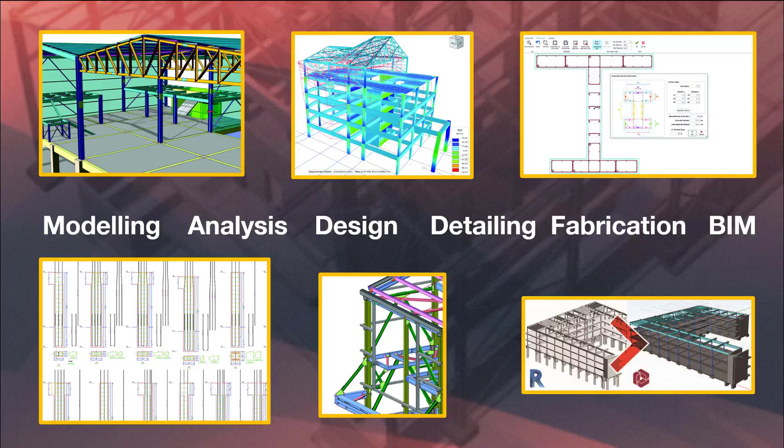In 2021, we introduced a revolutionary software which transforms the way engineers work and collaborate forever by integrating the way we model, analyze, design, detail, fabricate and coordinate BIM models with one completely integrated solution. One solution that combines all that structural engineers do when delivering projects into one software for building design and documentation. Integrating modeling, analysis, design, detailing, fabrication and BIM all in one, ProtaStructure 2021.

And boy has this been well received. Since we revolutionized the structural engineering industry in 2021, Prota has been growing at a frenetic rate as engineers around the world look to streamline and simplify the way in which they deliver their projects faster and more efficiently than ever before.

Since the release of ProtaStructure 2021, we have expanded our global reach to more than 30 more countries around the world. We are now actually supplied to over 60 countries around the world, not just with generic solutions, but with bespoke, customized solutions tailored to suit their local preferences. We have delivered even more codes of practice to support this, which continues to expand our reach.

And we have also allowed engineers to experience ProtaStructure firsthand with our comprehensive free trials. If you haven't already tried this, please jump onto our website, download it and give it a go. And we've improved further support with new YouTube videos, technology updates, new design guides and enhanced help systems and more to allow you to get the most out of your investment.

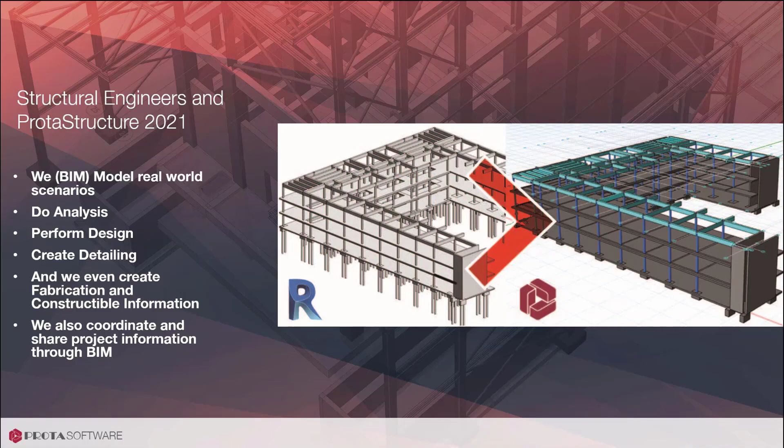We have seen more and more engineers around the world taking advantage of fast modeling, dedicated building analysis, bespoke design, automated detailing, fabrication, and sharing and collaborating BIM information with other parties. All the things they need to do to get the job done, with our one solution, ProtaStructure 2021.

This year, to recognise the efforts being made by thousands of users around the world, we established the inaugural Prota Design Awards for celebrating industry excellence in using ProtaStructure. Let's take a look at the winners.

We received some amazing projects from over 30 countries around the world, and it's been great seeing the many ways engineers have been using Prota's technology on building their building design, and this continues to encourage and excite us as we move forwards.

Innovation is part of our DNA at Prota, and over the course of the last 18 months, our teams have continued our journey to create elegant and practical structural engineering design solutions. This year we have focused on extending and strengthening ProtaStructure's capabilities to provide you with more flexibility, speed, transparency, design and BIM capabilities, all allowing you to better shape your world with our brand new ProtaStructure 2022.

Today we will be taking you on a journey through ProtaStructure 2022, and we are going to share with you many of the fantastic enhancements which make ProtaStructure the leading structural BIM platform for buildings. We're very excited. This has been a culmination of effort from a fantastic team of professional engineers and software developers around the world to realise this vision.

So, without further ado, what's new, Mustafa? Thank you, Nigel. This year we have made modeling more flexible and adaptable, allowing you to consider a broader range of structural arrangements together with increased flexibility to handle a range of different loading scenarios. This builds on Prota's impressive modeling capabilities, where you can start models in a range of ways.

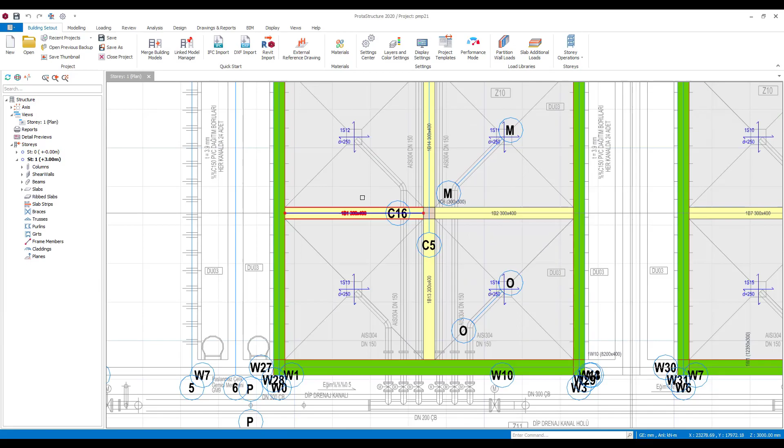Here you can see how we can create models from scratch using pre-existing BIM information like Revit, DXF, SAF, and IFC data. See how you can overlay against architectural drawings to coordinate and create your structural arrangements, or extrude elements directly from structural CAD files to set up key plans quickly. Furthermore, see how you can take advantage of existing BIM information, including IFC and Revit data, to start your modeling journey with speed and ease.

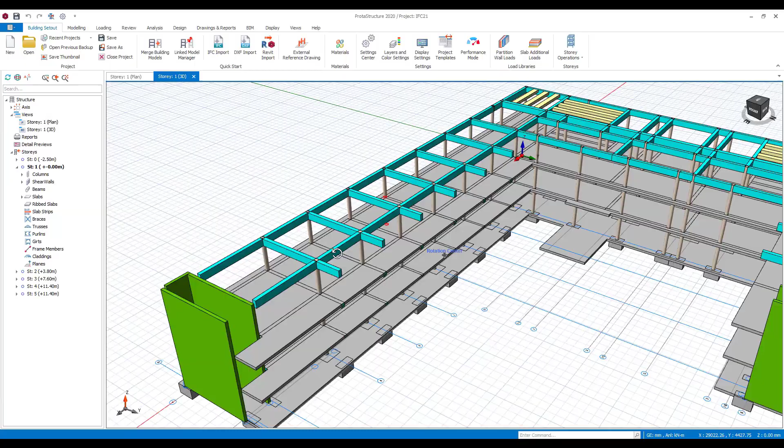ProtaStructure modeling takes advantage of dynamic input, where you can create axes, columns, walls, beams, slabs by boxing around or drawing what you want to see.

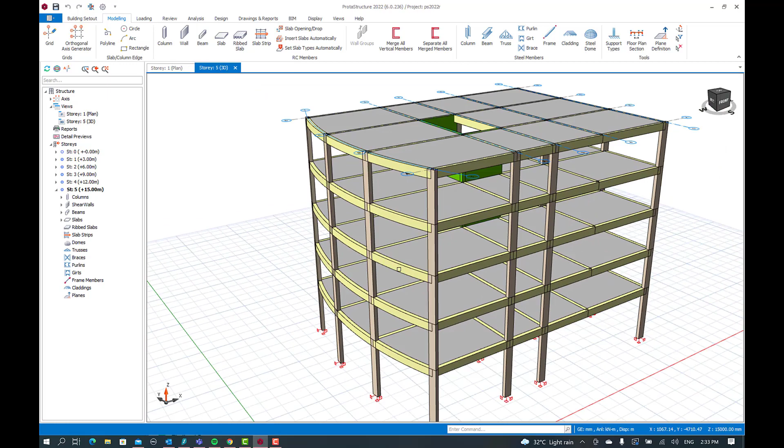ProtaStructure also uses intelligent contextual modeling to create a range of structural objects exceptionally quickly. Whether it is integrated core walls, trusses, braces, purlins, or girts, ProtaStructure provides intuitive modeling commands to preview and rapidly create these items instantly, without the headache of modeling every node, member, and property. Furthermore, this intelligence passes into element design, as ProtaStructure knows you are designing a core wall, truss, or purlin, and efficiently handles all the associated design checks.

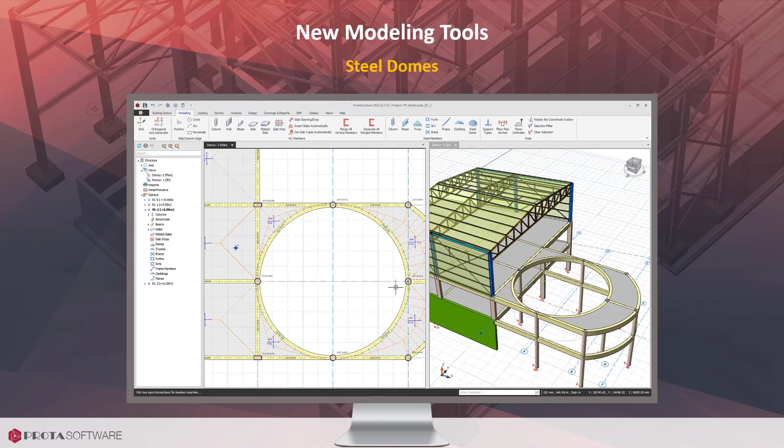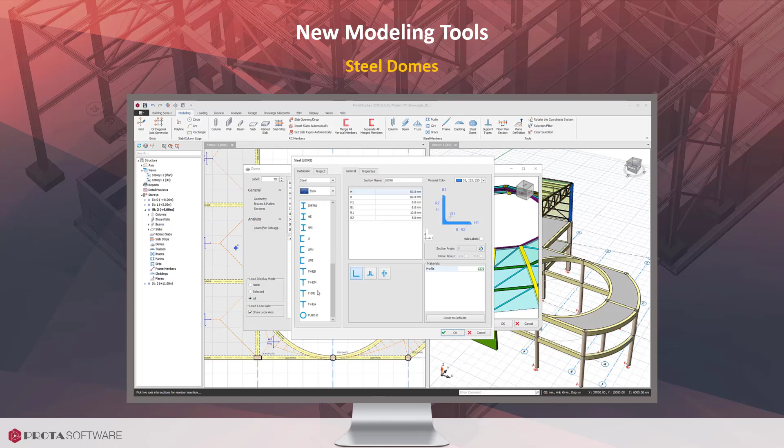With ProtaStructure 2022, we continue to expand this flexibility and speed. You can now go one step beyond and create steel domes with the help of a highly parametric wizard. This is dynamic and detailed. See how you can independently control the geometrical and section properties for crown, longitudinal, latitudes, brace, and purlin members, forming the perfect dome of your choice.

It doesn't stop there. Now, we make it possible for you to insert curved frame members in any plane orientation, allowing you the flexibility to express yourself and meet more demanding geometric challenges architects and developers are pursuing.

This can easily be complemented with free member modeling, allowing more freedom than ever before. It looks great, doesn't it?

We also strive to improve the performance and technology of our software in almost every release we deliver, making it a faster and more streamlined experience for you.

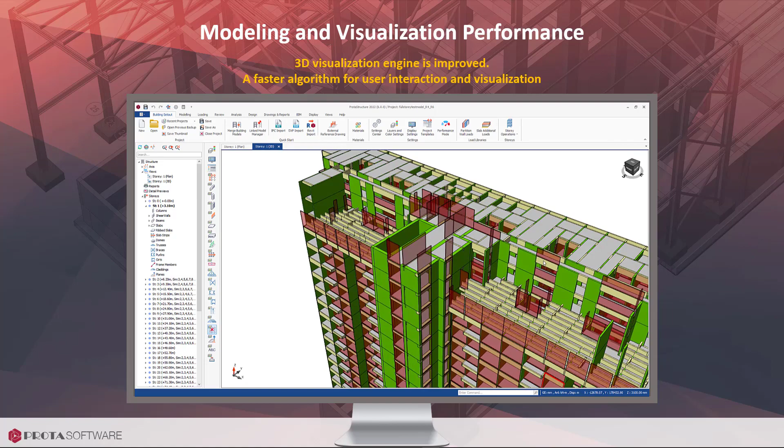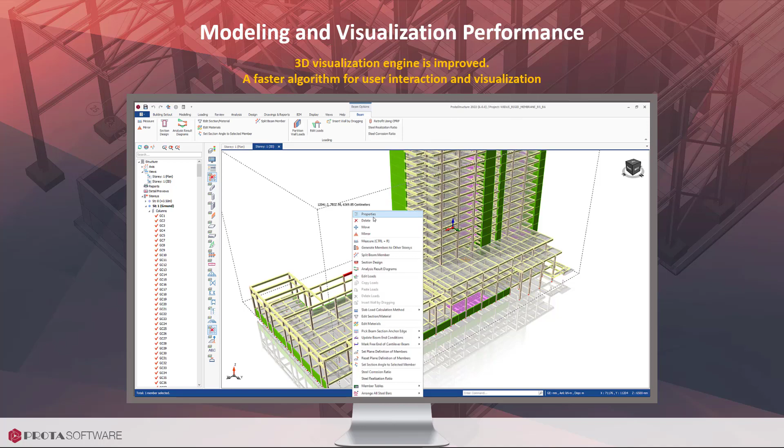In ProtaStructure 2022, we focused on increasing the performance of our 3D visualization engine and user interactions. You will find performance gains up to 10-fold depending on the model size, allowing you to quickly and dynamically interact with the smallest house to some of the most significant buildings in the world, providing our users with a fast, smooth user experience.

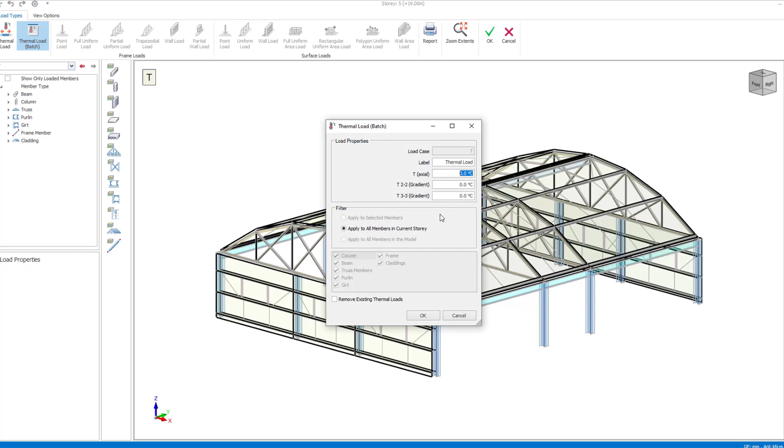We recognize that engineers want the flexibility to create any type of load intuitively and quickly to any element in their projects. With ProtaStructure 2022, we have completely redeveloped our loading system to provide unprecedented flexibility to define the loads you want on what you want.

Don't worry, all the great features which make ProtaStructure so efficient, including automated slab load decomposition and dedicated brick wall loading on beam members, remain—of course, with a lot of enhancements and automation. For example, you can now see how the height of the infill load automatically updates when the story height changes.

I can apply additional member loads in any orientation to any load case, or use the load generator for quick generation of any common load profile.

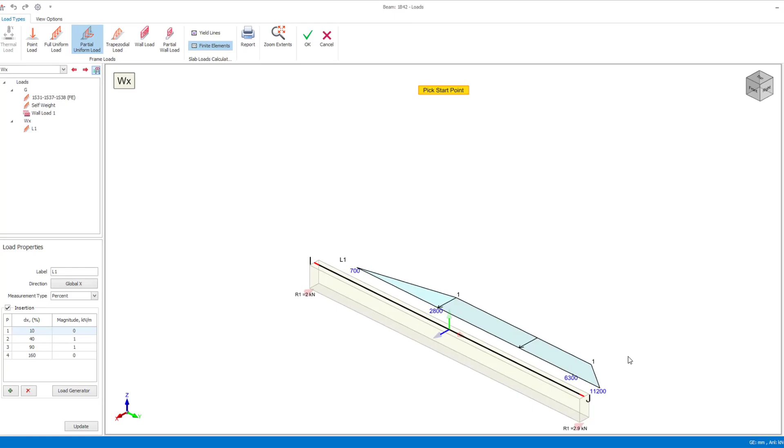We know that it's tedious and time-consuming work to calculate and apply soil pressures. Now we take that burden from your shoulders. Just provide your soil profile and specify the surcharge loads. Resulting static and dynamic loads are calculated according to your preferred loading and seismic codes and applied automatically. You can do further editing on the calculated loads and even create a detailed report.

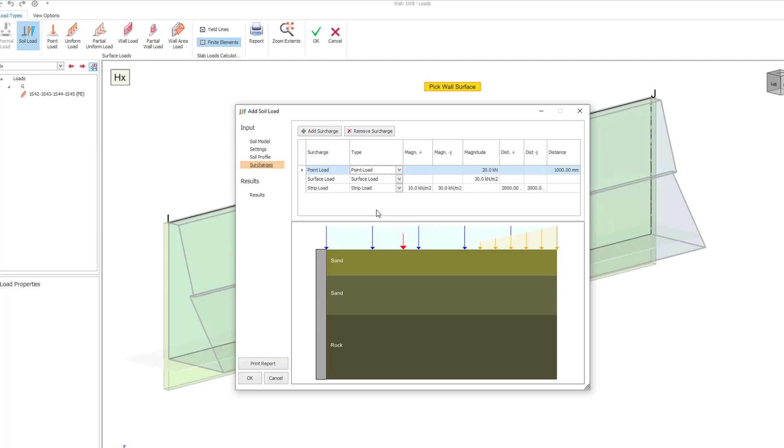As we covered already, you can create frame members curved in any plane. Let's see how easy it is to load them too. You can use the quick snap points interactively or use the insertions table. This helps you define your load as a percentage of the member or with an absolute distance.

Truss loading is faster than ever too. Point loads on nodes or line loads on frames are defined intuitively, just like the domes. Well, domes need further attention as they can also utilize pressure loads. Just enter the magnitude and show where to apply.

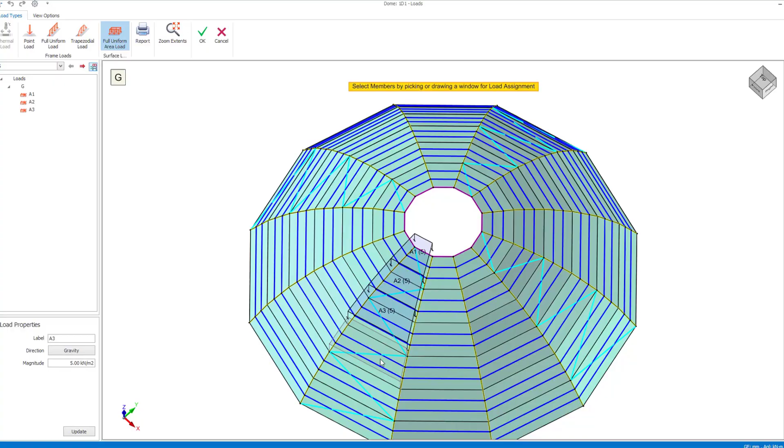You can define cladding loads similarly. This time let's see how quickly we can define pressure loads by just boxing around instead of picking members.

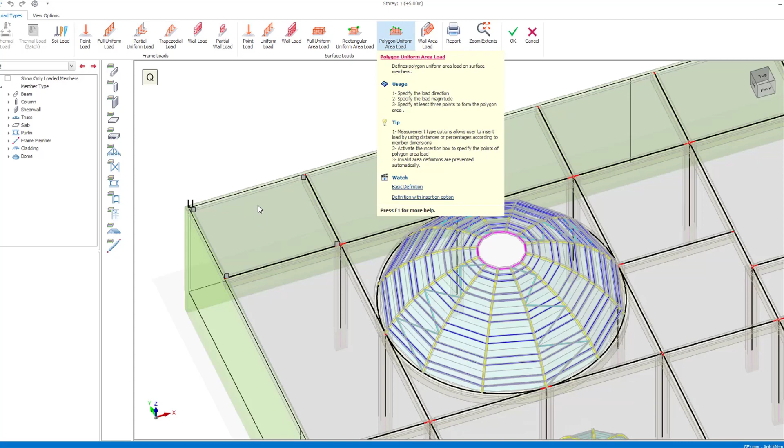Although working on individual members carries its own advantages, sometimes we need to see the loading of the whole story. When I switch to story mode, I suddenly possess an X-ray of the model, allowing me to easily filter and spot specific member loads and apply new loads of any kind.

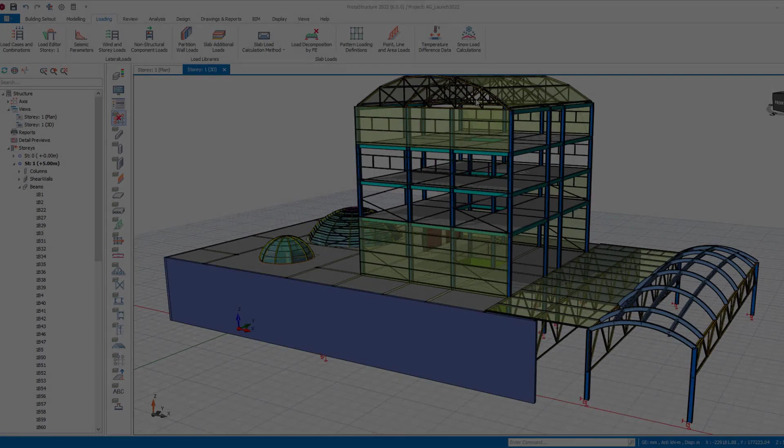Maybe you create a slab patch load and copy it to the other slabs. Or let's take this curved frame load and apply it to the other frames, which in fact have different geometries. You can delete, copy and paste loads, even between different load cases in this editor.

But we haven't kept these crucial functions inside this editor only. Enhanced versions of them are still available in the modeling environment as well. You can copy the loads between members for any load case and load type using a single user interface. And of course, you can still copy infill loads and paste them by dragging.

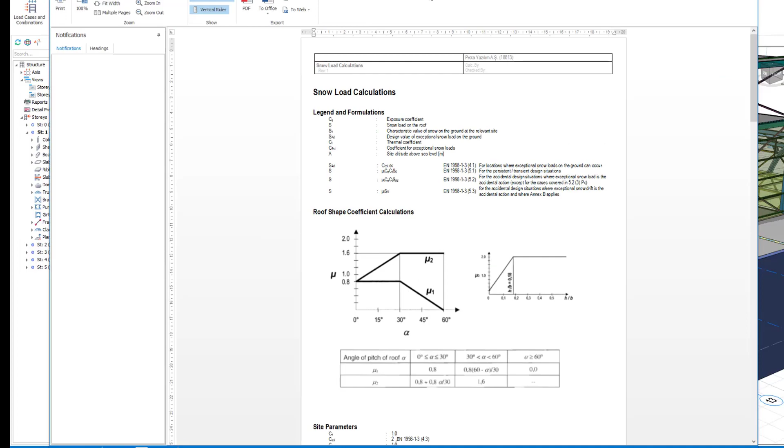For those in colder climates, we have implemented automatic snow load calculations to Eurocode, including the base code and a variety of national annexes. A parametric wizard will guide you step by step in calculating the snow load in your region and applying these to your models. Quick and easy.

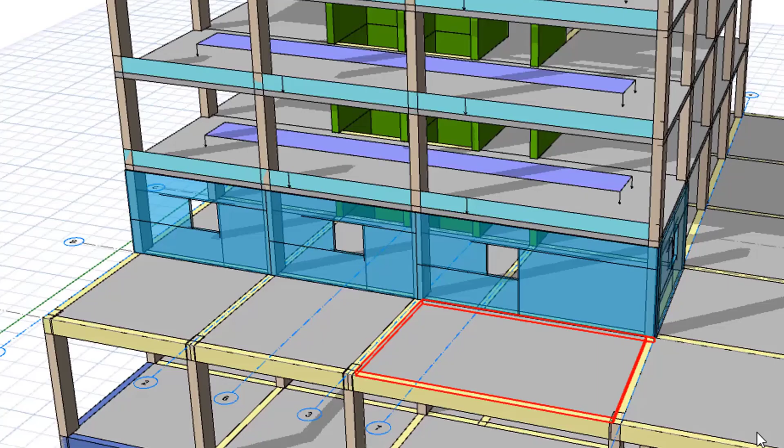What if you want to apply some of your vertical loads in a separate load case? Maybe you have special equipment loading to be applied and you want to treat this loading exclusively with different combinations. Here I am creating such a user-defined vertical load case, and I can instantly start assigning loads with this one. Let's create a patch equipment load on this slab.

Now I can copy this load to the other slabs. All done in seconds. In a nutshell, ProtaStructure 2022 redefines how you work with loads.

Engineers are increasingly faced with a range of different analytical considerations as structures become increasingly complex. Whether you are looking at a finite element floor analysis, complete building analysis, considerations like soil structure interaction, or methodology for tackling super high-rise buildings, at Prota, we have been looking at better ways of simplifying the management of all these considerations in one.

To assist with this, ProtaStructure 2022 introduces several great new analysis features, starting with our new analysis framework.

ProtaStructure 2022 makes it easy to analyze the floors separately. You can control the mesh sensitivity and other mesh parameters, such as the inclusion of column outlines in the FE mesh.

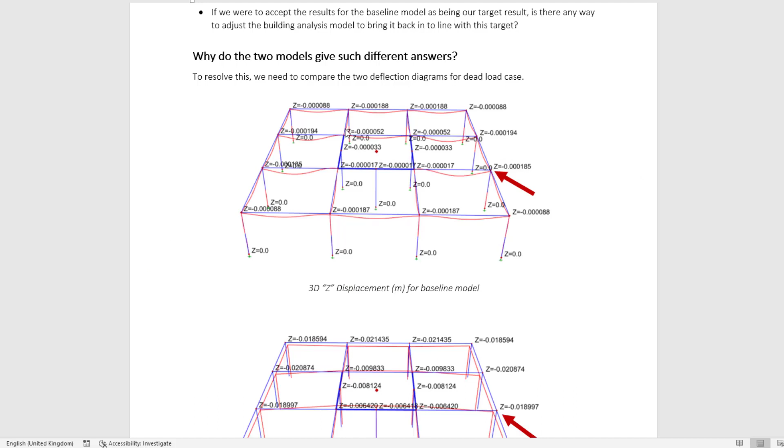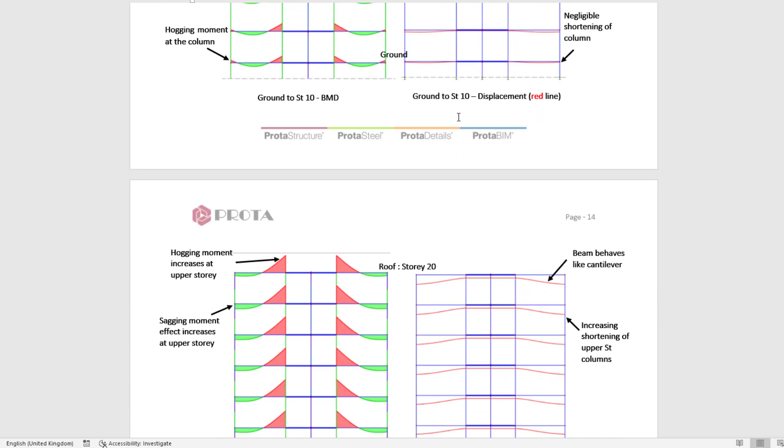Here we isolate the building floors and analyze them under vertical loads only. This approach may be preferred by engineers who want to design against vertical loads by approximating conventional methods using this sub-frame analysis model. This method helps eliminate the 3D frame effects caused by differential axial deformations in a 3D building analysis. However, you should be comfortable that this approach is suitable for your building.

You can easily review the finite element results by quickly switching between the stories in the analysis post-processor. When you're done, you can proceed with the design of the slab reinforcement using vertical loads only if you wish.

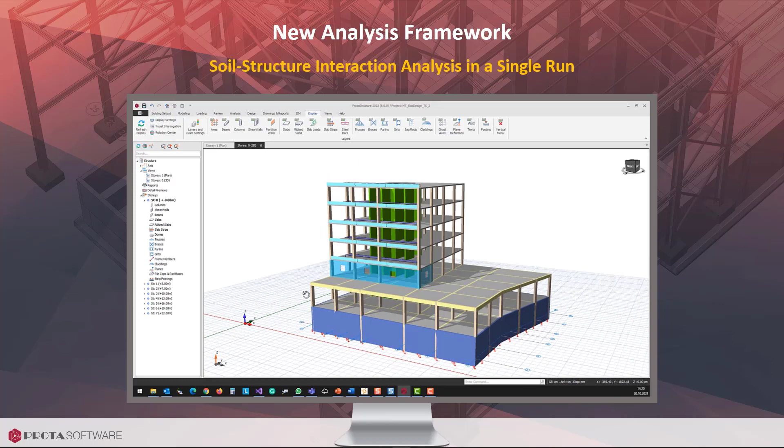You can also now perform soil structure interaction analysis in a single analytical run, together with the superstructure, enabling you to automatically model the foundations and consider the analytical foundation model in the building analysis. There is now no need to iterate between the building analysis and foundation models like older Prota versions.

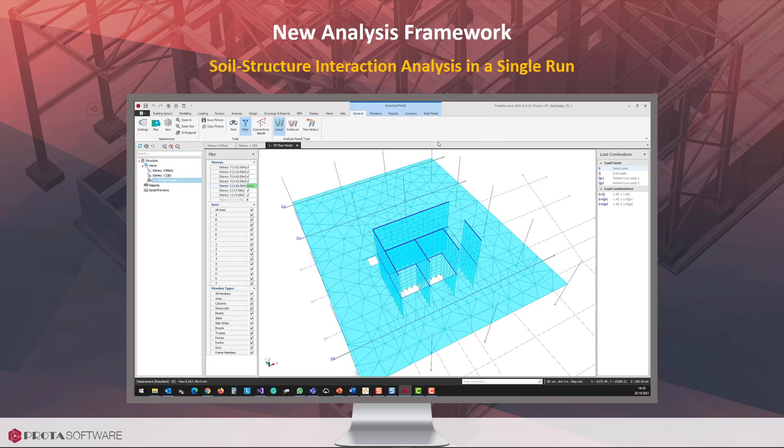We have also introduced next level in analysis post-processing. This provides significant performance improvements, including faster and improved visualization, better RAM, CPU, and GPU utilization, improved finite element contouring, complete 3D visualization of slab strip diagrams, and a great new diagram plan view where vertical results can be easily interpreted and reviewed in plan.

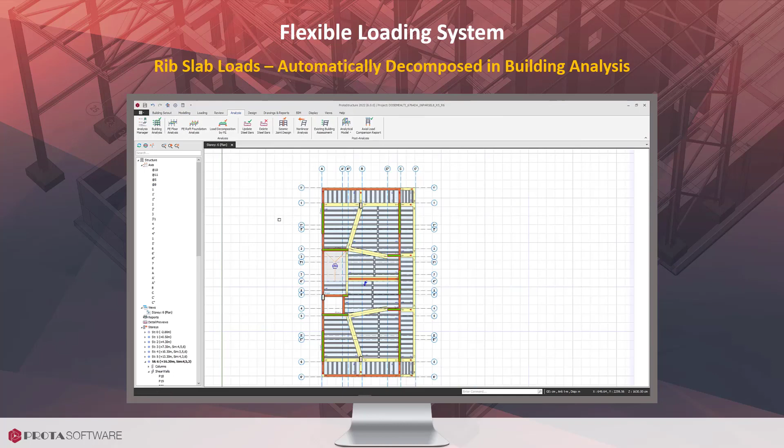Rib slab loads are now automatically decomposed in building analysis. This approach improves upon previous versions of ProtaStructure, in which rib slab loads were decomposed by the yield lines method or finite element decomposition method before building analysis.

However, from now on, rib beams are automatically included in the building analysis model and loads are transferred intrinsically during the analysis using the defined connectivity.

And especially for those engineers taking on some of the tallest buildings, we have also introduced advanced stage construction analysis. This is where you can now consider the variation of time-dependent properties, elasticity, creep, and shrinkage of concrete based on time models specified in FIP Model Code 90 and Eurocode 1992.

Creep and shrinkage strains are incorporated in the stage construction load cases, and analysis is performed depending on the time between stages and post-construction. This new capability now allows engineers to more accurately assess the behavior of tall buildings, where these effects may require careful consideration.

So, with our new analysis framework and great new features like advanced stage construction, you can see we have added some excellent new analytical capabilities in ProtaStructure 2022 this year.

Naturally, with extending our modeling and analysis capabilities this year, we have also focused on extending our design capabilities, where significant strides have been made.

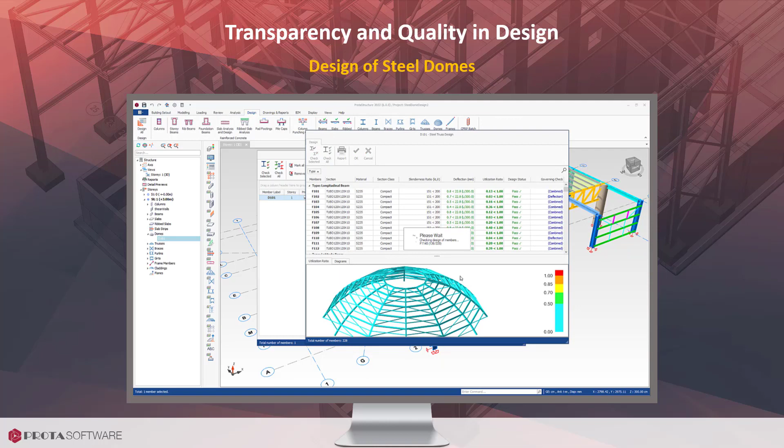Some of the exciting new design capabilities we have been busy implementing now include designing all the various members that make up our new steel domes, from the braces to main frame members. All elements are checked to your chosen code.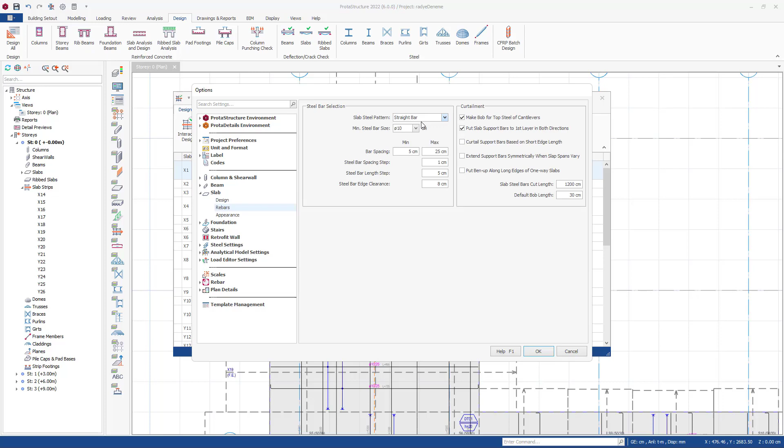We have also redeveloped the user interface for a seamless slab design approach. You'll see it is now more user-friendly, enabling you to copy-paste the bars, and you'll be able to quickly interrogate the details of the design in a drill-down approach.

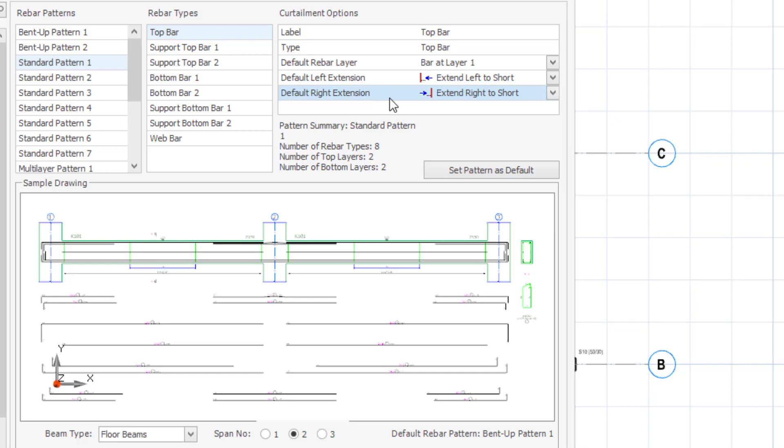ProtaStructure 2022 has entirely redeveloped our reinforced concrete beam design platform, introducing significant new capabilities. One key area is our new flexible rebar patterning system.

This allows users to choose from a broad range of rebar pattern preferences to suit local detailing requirements or specific requirements for a project you are doing, like bent-up bars or drop-in cages.

These new capabilities also include removing any limitations on the number of bars, particularly beneficial for heavily loaded beams.

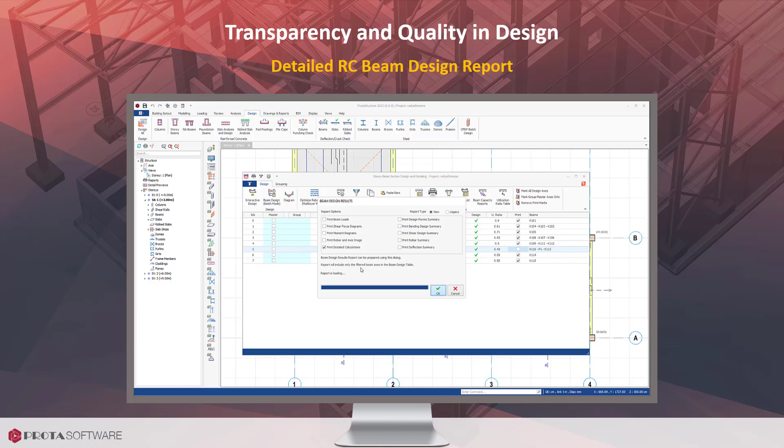Providing transparent design documentation to our users has been a paramount priority for us. And with ProtaStructure 2022 this year, many design reports now provide detailed information, including step-by-step calculations showing how the element design has been established following your chosen code of practice.

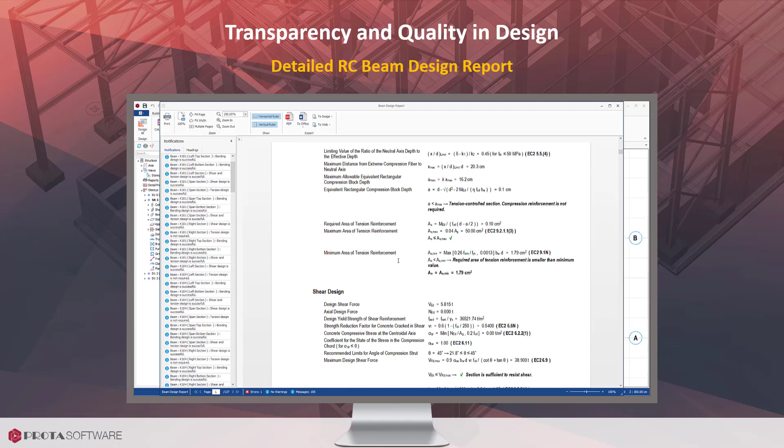Progressively through updates this year, you'll see a range of new design reports being introduced, including reinforced concrete beams, which now include more details, including formulas, step-by-step calculations, and code references, providing you with clear insight into your design results.

In addition to the reinforced concrete beam design reports, pile caps and pad footings now also include comprehensive design reports, providing you with invaluable insight.

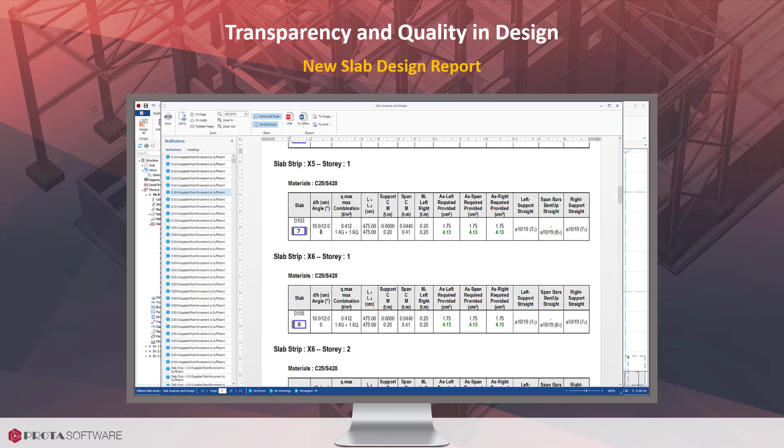In addition to more detailed design reports, we have also taken the opportunity to modernize the slab design report. You'll see it is much more visually appealing with clear tables and intelligent notifications. Slab design reports are now more comprehensive and automatically created in batch mode for selected slab strips.

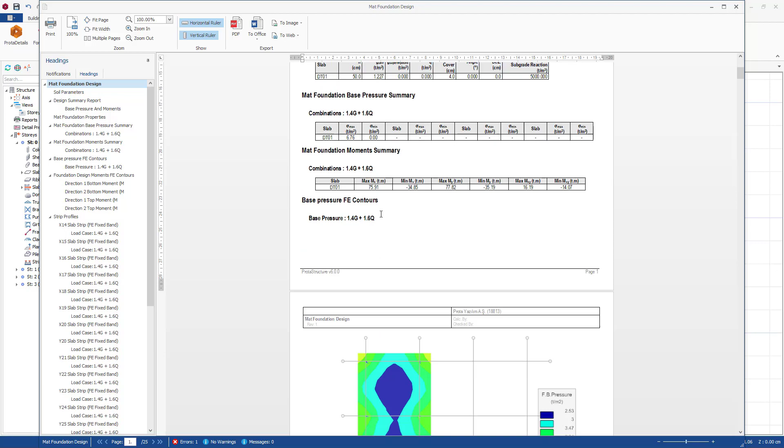A regular ask was an integrated mat foundation report, and we have listened, providing a detailed report that brings together all aspects of a mat foundation design, including FE contours, soil pressures, rebar design, punching checks, and so on. A great addition.

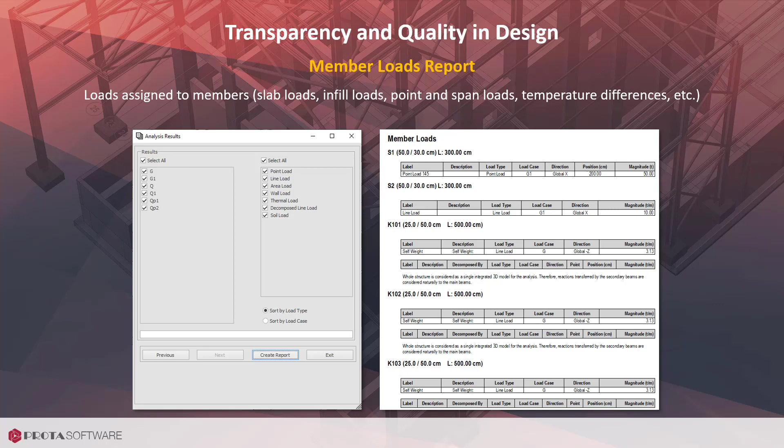Detailed reports are created that summarize all the load information in the model. You can create the report with filtering members and load cases.

We have also added a new report which summarizes column, beam, frame end release conditions, support assignments, splice locations, and isolator assignments.

The results of building analysis and finite element floor and foundation analysis are obtained using the same interface. Moreover, these results can be exported to Excel if you need to interpret and refine them further to your needs.

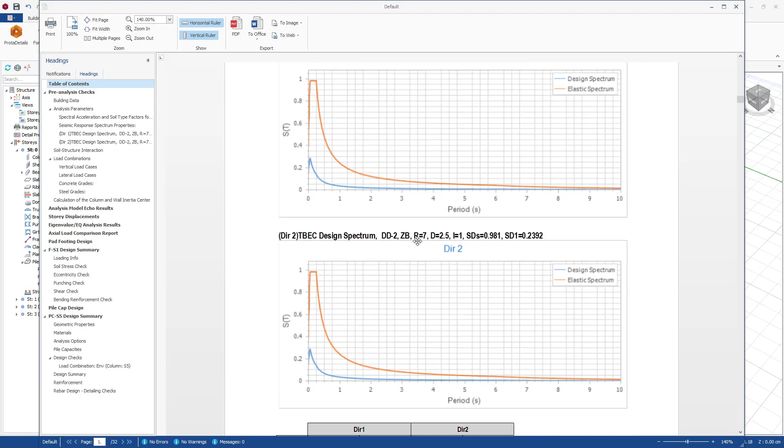With the above, we are providing much more insight and detail into your designs. All of this can be seamlessly wrapped into Report Manager for effortlessly combining all your results into one organized document, including your table of contents and customized to your company's standards. How easy is that?

With ProtaStructure 2022, we also support Polish, Romanian, Serbian, and Slovenian languages. These can be chosen at startup, where you will be able to set UI and report languages separately. This adds to our collection of supported languages, including English, Spanish, Portuguese, and Turkish. Prota is becoming genuinely local and global.

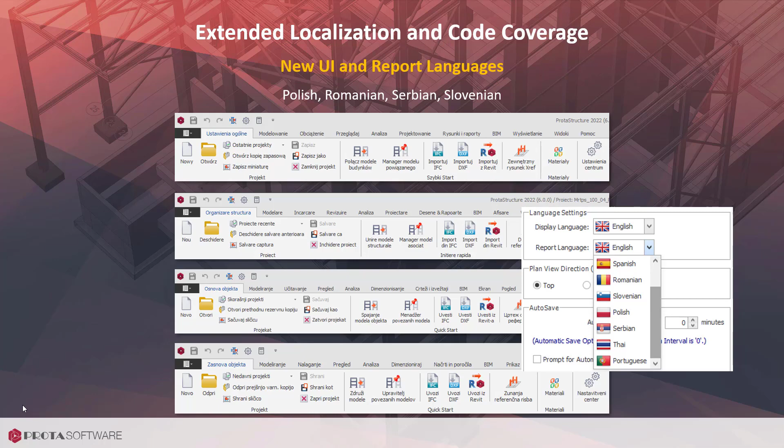We recognize that many of our users still have to deliver projects in imperial units. These have now been added and used during modeling, analysis, design, documentation, result review, and detailing. What's great is that if you are unfamiliar with imperial units, you can start in metric and switch between unit systems at any time. Very flexible indeed.

We have also continued to introduce new codes of practice this year and extend further support to existing codes in ProtaStructure 2022. So whether you are designing buildings in Romania, Thailand, Indonesia, or Peru, we have local code support specifically developed to suit your requirements. A real strength of ProtaStructure is our comprehensive seismic design, which is born from our extensive experience in research and design of building structures over the past 40 years.

And this year, we have added extensive new seismic functionality, extending our capabilities as a global leader in seismic design and building assessment technologies. With ProtaStructure 2022, you can calculate forces acting on non-structural members and their connections to the buildings.

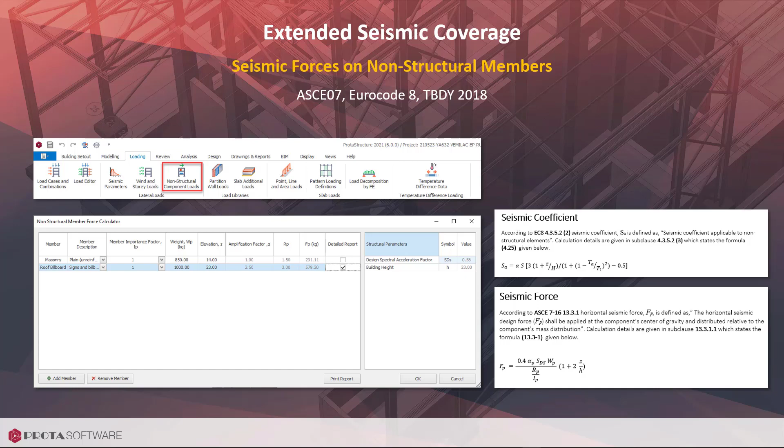This is done to ASCE 7, Eurocode 8, and Turkish earthquake codes. Just specify the non-structural members and their properties, and ProtaStructure will automatically calculate the story accelerations and the forces depending on the analysis type. To avoid pounding damage in adjacent buildings, engineers need to consider sufficient spacing between structures.

Our seismic joint design tool does just that by designing the seismic separation requirements between two buildings or across construction joint separations. This works in several ways. You can either load the displacement of an existing ProtaStructure model or enter the second model's displacement values manually. ProtaStructure will perform the calculations to ASCE 7, Eurocode 8, and Turkish earthquake codes.

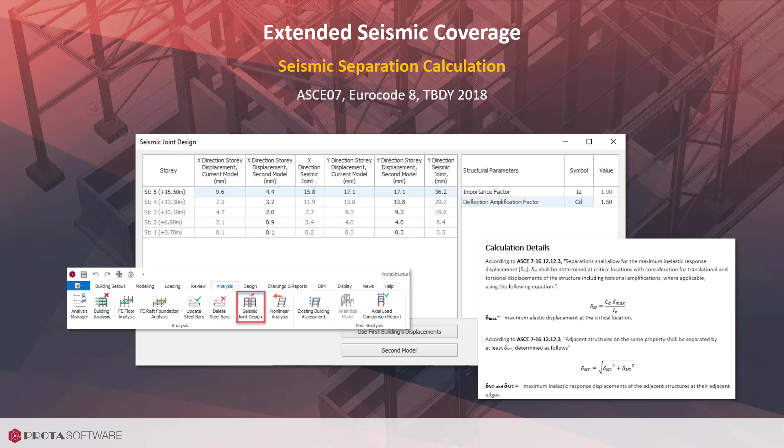ProtaStructure 2022 makes strong column checks of reinforced concrete and steel special moment resisting frames easy. You can automatically check these according to US, Euro, and Turkish codes of practice.

In addition to new code coverage, the strong column weak beam and joint shear check reports are rewritten from scratch to include more visual components with intelligent notifications.

Strong column weak beam and joint shear checks can now be reviewed for a single column and beam while designing their reinforcement. In this way, you can fine-tune the design while keeping an eye on these global seismic checks. The status of these checks can also be reviewed using the new visual interrogation options.

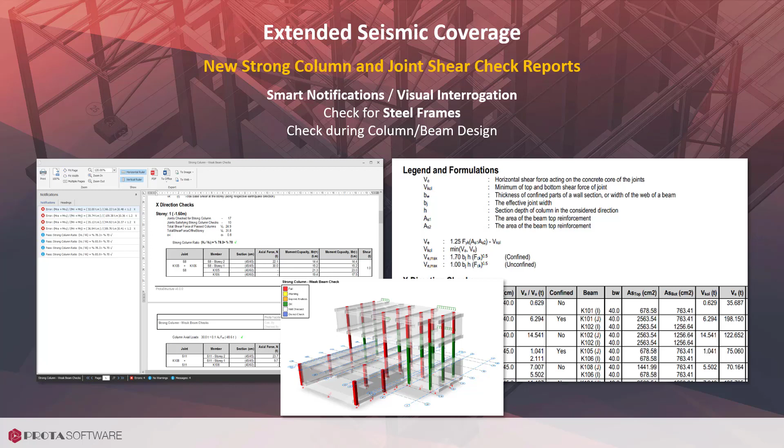For beams spanning into the columns from different axes or elevations, you can specify to consider them continuous or not in joint shear checks. Vertical and plan continuity tolerances can be utilized to achieve this. We see these enhancements as providing significant productivity in performing critical checks, which generally are highly tedious and time-consuming.

In addition to our advanced nonlinear pushover and time history analysis capabilities, we have extended our comprehensive building assessment and performance design capabilities this year. A vital step after pushover analysis is to find the demand that a target code spectrum requires, that is, the performance point. A target displacement identifies the performance point, and this can be compared with code guidance to assess building capacity.

After plotting the capacity curve, ProtaStructure 2022 can now detect the target displacement value according to FEMA 356, Eurocode 8, and Turkish earthquake codes.

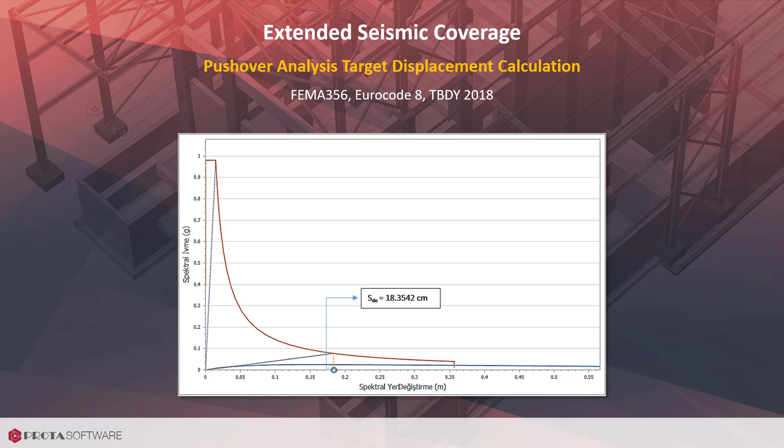ProtaStructure is also capable of retrofitting and assessing beam and column members confined with carbon fiber reinforced polymers. The CFRP confinement positively affects the shear resistance and axial load capacity of members. Currently, these effects are considered according to Turkish seismic code. Eurocode and US code guidance will follow.

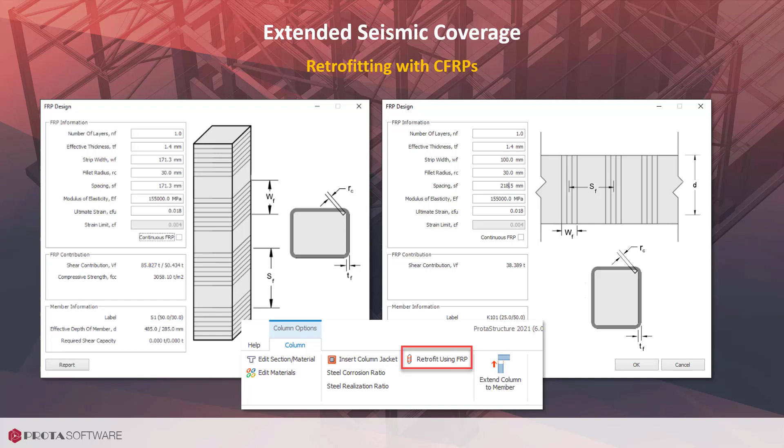This adds to our comprehensive retrofit capabilities, where ProtaStructure can include infill shear walls, base isolation, and steel and concrete column jacketing to enhance building performance to meet code requirements and allow you to assess building performance or your building retrofit strategy.

To visualize this, ProtaStructure 2022 can present the member damage regions and risk status by new color-coded visual interrogation options, an excellent tool for quickly seeing your building status.

Site coefficients FA and FV on the seismic parameters window are now user-editable for US, Indonesian, and Thailand codes. This will help you adapt to different regional implementations of US codes. These parameters will revert to their code-based values when site class is changed.

As a comprehensive solution for seismic design, ProtaStructure automatically compares the response spectrum base shear to the equivalent static base shear and scales up the internal forces and displacements.

This scale factor can change with any structural irregularity in the system, and RSA scaling factors for regular and irregular cases are now user-editable in ProtaStructure. You can override the code-based values by checking the Use User-Defined RSA Scale Factors checkbox and typing in the values you want to use. I think you'll agree that many of these fantastic seismic design features will save you hours and days of design time and further reinforce our commitment to providing global leading seismic analysis and design technology.

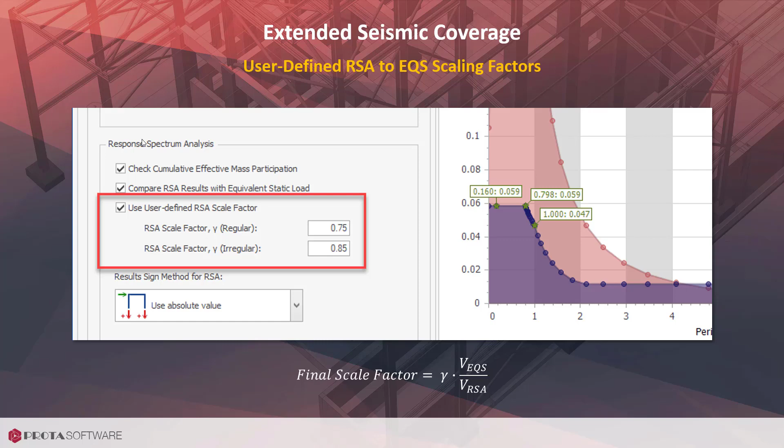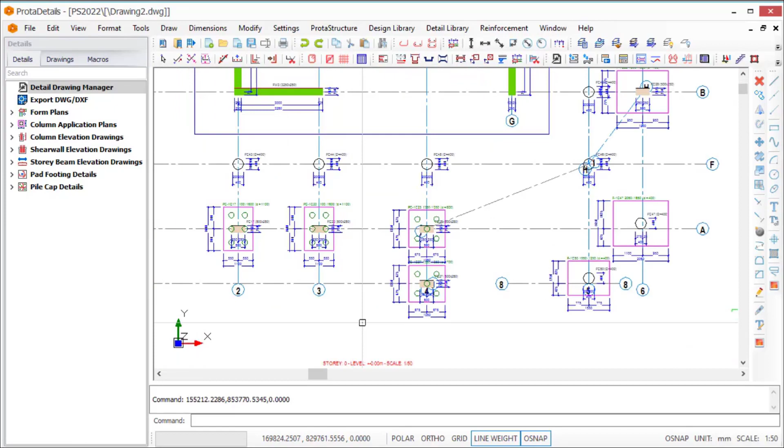Now, once your design is complete in ProtaStructure, this is where the power of having one integrated seamless system transforms documentation. Here you can see that I am automatically creating all the RC drawings, all laid out into my sheets with a single click. Everything is created from the foundations, set out plans, columns and wall elevations, grouped column schedules, to all the beam elevations.

Beam schedules can also be provided to complement the design. And last but not least, we have our foundation details, all automatically laid out into your drawings.

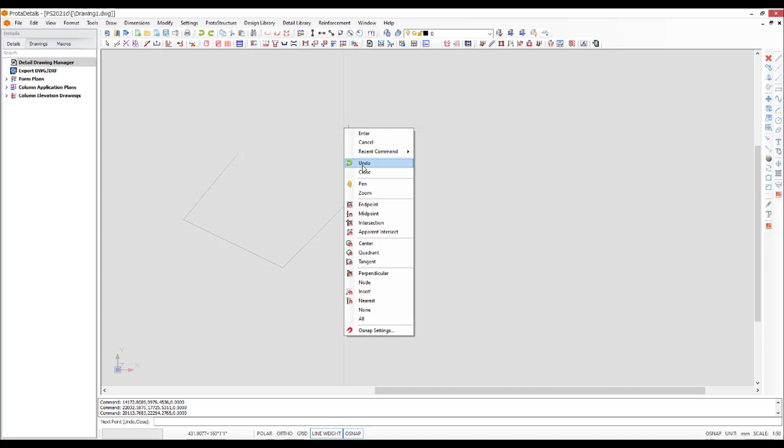Remember, ProtaDetails environment is a fully flexible CAD system. It uses standard CAD commands like you'd find in other drafting systems like AutoCAD, but we have gone one step further. In here, we have also provided you with custom tools especially developed to help you edit, manage and create your structural detailing. Here I'm cropping a section and moving it to another part of the drawing. Here I'm using our intelligent custom rebars to help me detail out additional information I want to convey.

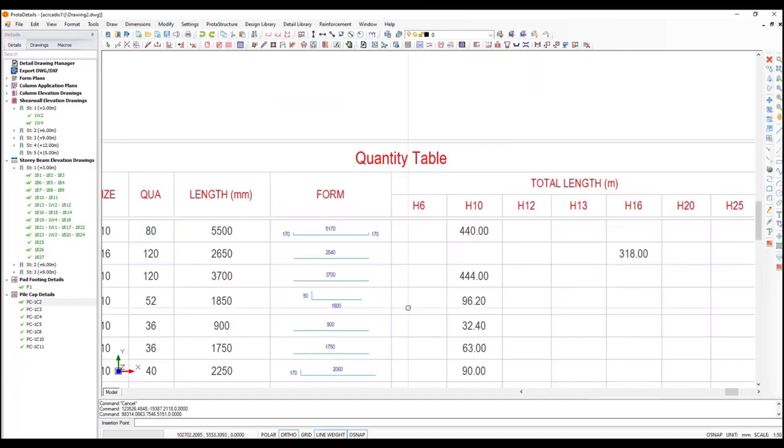We also understand that projects are not just about drawings. Owners want to know costs and contractors want to be able to fabricate. Here I'm selecting some details of interest and instantly creating the full quantity schedules. Every bar broken down and quantified in one live schedule.

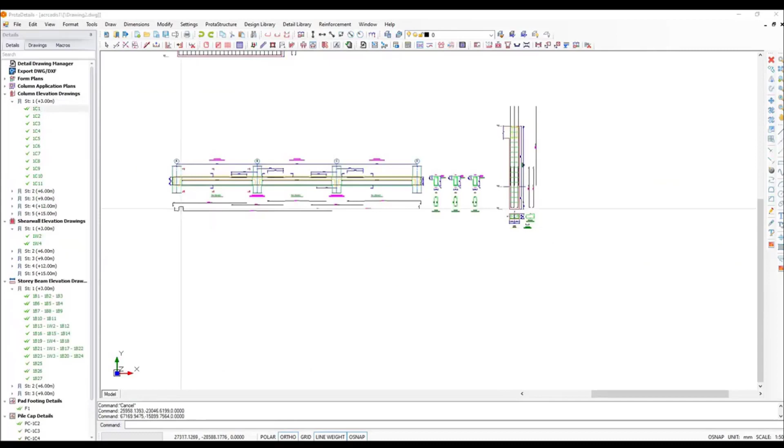And this year we have enhanced this further by providing comprehensive quantities takeoff for merged core walls, and if there's changes, just make the changes and the quantities dynamically adjust. We can update changes real-time, keeping you and your client informed. For fabrication, bars can also be broken out and displayed in detail.

Every element that goes into constructing your project can be drawn out. We have also now enabled full export of all your quantities to Excel, a great way to apply costs and compare different schemes. ProtaDetails also comes with a built-in library of design and detailing macros. These macros enable you to create, design, and detail a range of common structural elements.

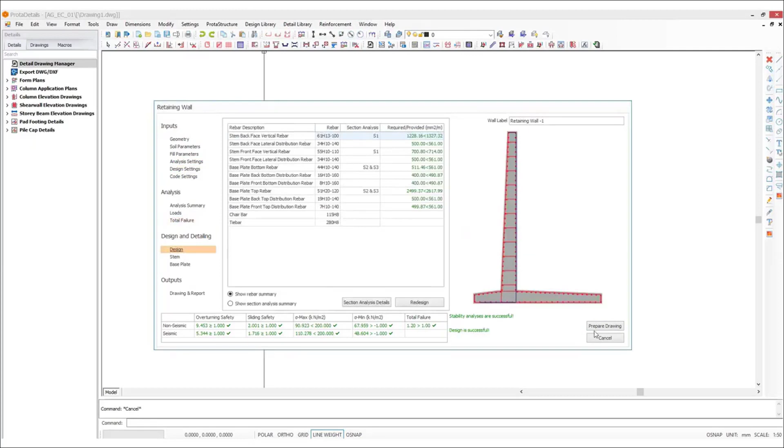Here you can see how you can run design for elements, including retaining walls, where you can consider water tables, soil parameters, static and dynamic loads, together with a range of different wall configurations. And staircases, including spiral and conventional arrangements at a touch of a button. Of course, all these design components are complemented with complete detailed drawings with live quantity takeoff.

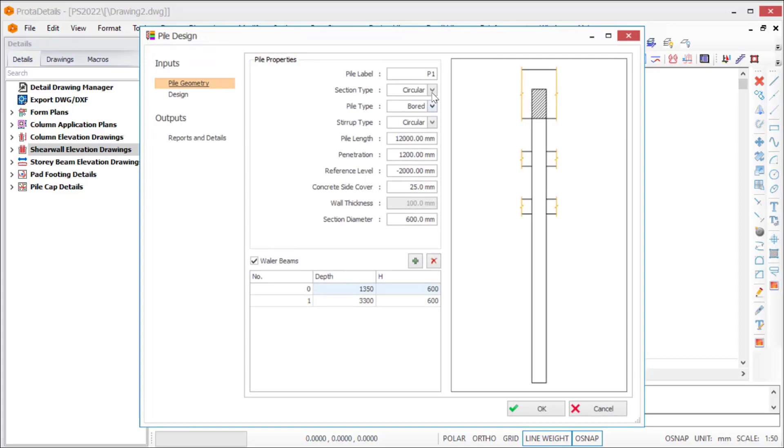Pile design covers pre-stressed, spun and conventional square and rectangular arrangements, including detailed geotechnical considerations and static and dynamic loading for lateral design.

You can even go for a dip in our new swimming pool design. How refreshing is that?

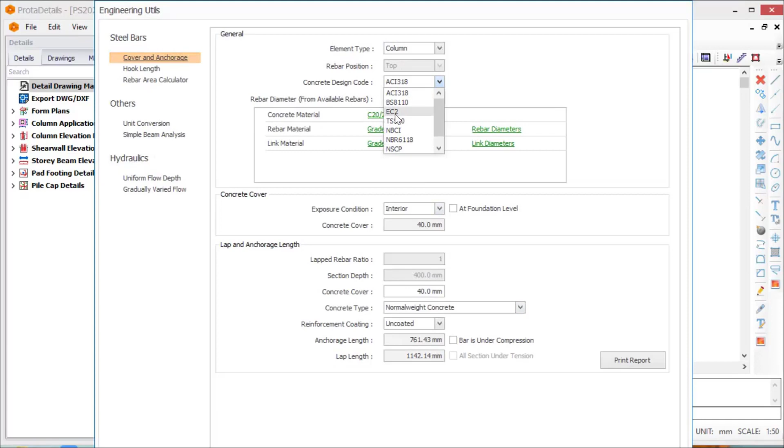ProtaDetails also allows you to examine detailed information, including lap length and anchorage reports, where you can see step by step the code considerations for establishing these detailing requirements.

We now fully support imperial units, meaning it is covered in the whole modeling, analysis, and design output experience. And of course, you can also create drawings in feet and inches with imperial grading of rebars. Great for those delivering projects in the United States and other imperial unit-based territories.

Many other refinements have also been introduced this year, making ProtaDetails a powerful drafting tool for delivering tremendous drawing productivity for your business.

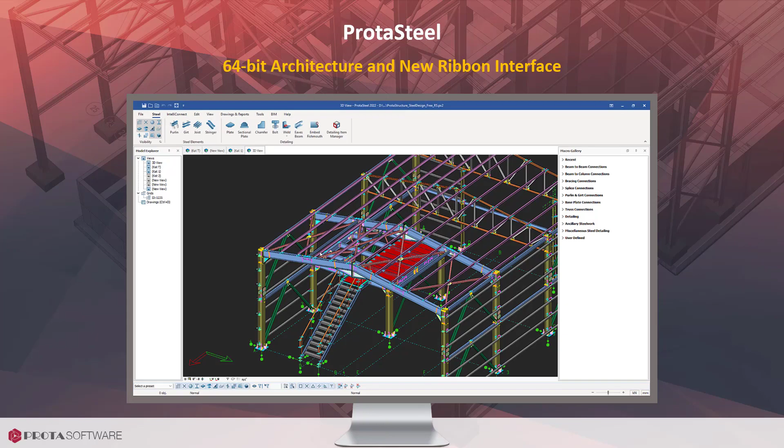You are already fond of ProtaSteel for automated connection design, steel detailing, and shop drawing production. In 2022, we made it even better. Now, a more performant and modern 64-bit software architecture is brought to you by our team of developers. Also, ProtaSteel has undergone a complete facelift, featuring a new intuitive modern ribbon toolbar. I can easily say that ProtaSteel is now even more compatible with the usage habits of drafting technicians and industry standards, with a spice of Prota expertise on top of it.

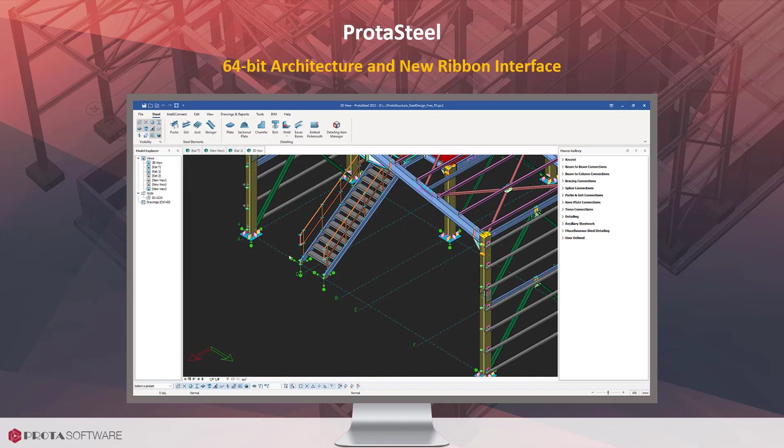The new macro gallery makes picking the desired connection type a breeze thanks to its categorized views and self-explanatory large thumbnails. Also, it features a recent tab that will automatically populate as you start inserting connections.

One of the powerful features of ProtaSteel is the ability to create user-defined connections and save them for later use in similar joints. We have now developed a new wizard that will make your life even easier when you want to create your user-defined connections. Just follow the wizard instructions and you're done.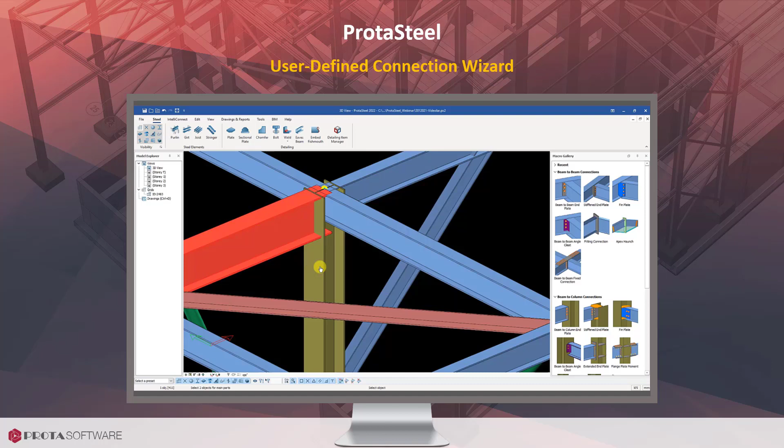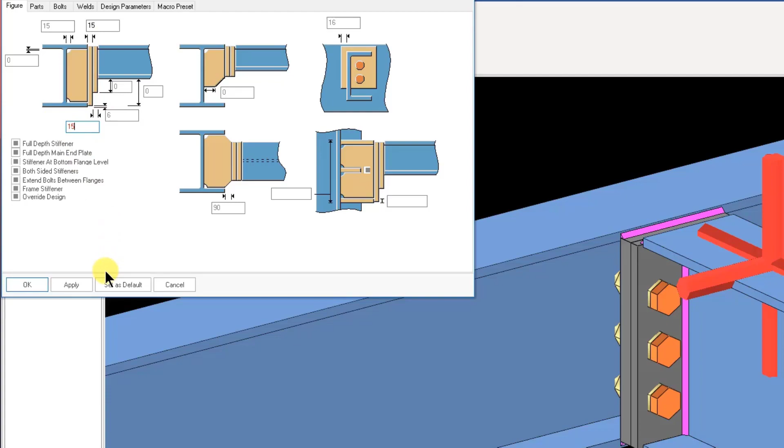Macro dialogues are now more intelligent in ProtaSteel 2022. Input fields now display the actual values used in connection macros for straightforward interpretation. A gray color indicates the automatically calculated or previous default values. Red means a new user value is entered, but it is not reflected in the macro yet. Black indicates a user value that is reflected in the macro.

We have also added several new connection macros, building on the already extensive industry-leading library of connections you can automatically design and detail. You can now use the angle cleat connection to create a simple connection between beams and columns. This connection also supports a detailed design check report.

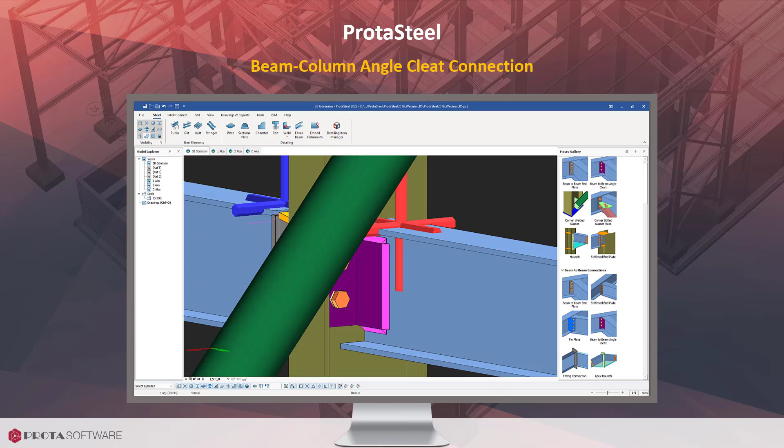In addition to the standard splice connection, ProtaSteel 2022 introduces the new bolted end plate splice connection. This connection may be particularly preferred in low moment and low tension scenarios. When it comes to end plates, there are many variations and design scenarios.

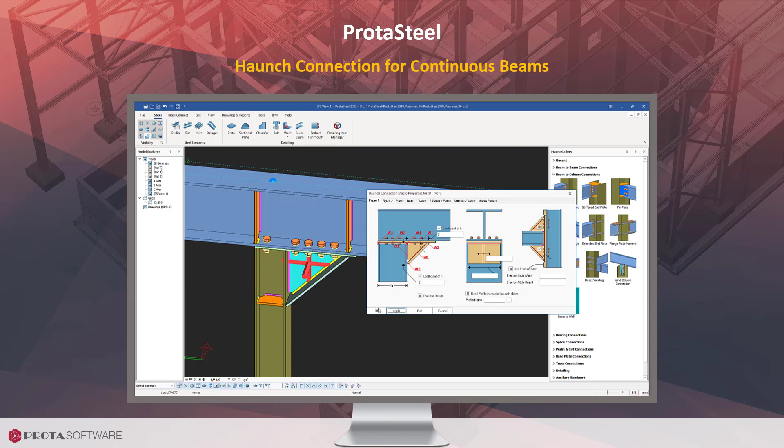You can now insert base plate connections to box and pipe sections. A new type for standard haunch connection is introduced. This type is advantageous if your beam needs to be continuous without interruptions, such as beams supporting monorails and such.

A vital usability improvement comes with object selection. In ProtaSteel 2022, the selection operation automatically groups the selected objects. You can filter the selection on the fly to different materials, profile names, plate thicknesses, and several other object attributes.

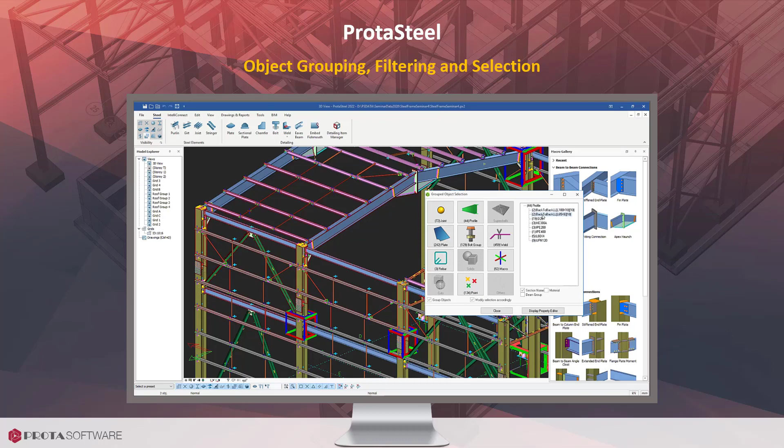For even greater customization, we have introduced new program-wide setting systematics in ProtaSteel 2022. These are global settings, company settings, and local settings. Local settings are now stored in the project folder and carried around with the project. The settings from these three levels can be summoned in all macros. Alternatively, you can save and use your own settings. This system is designed to be very similar to the system used in industry practice. So, another gap is closed with ProtaSteel 2022 by fulfilling this critical user feedback.

And lastly, don't forget the magic of ProtaSteel's IntelliConnect for automatically designing your steel connections instantly, as well as the robust structural detailing and shop drawing capabilities.

BIM is at the forefront of design collaboration, and at Prota we understand you want to be able to share your project information across a range of platforms. To continue to provide leading BIM collaborative technology, we continue to engage with many other leading software businesses to provide easier and more intelligent ways to share information.

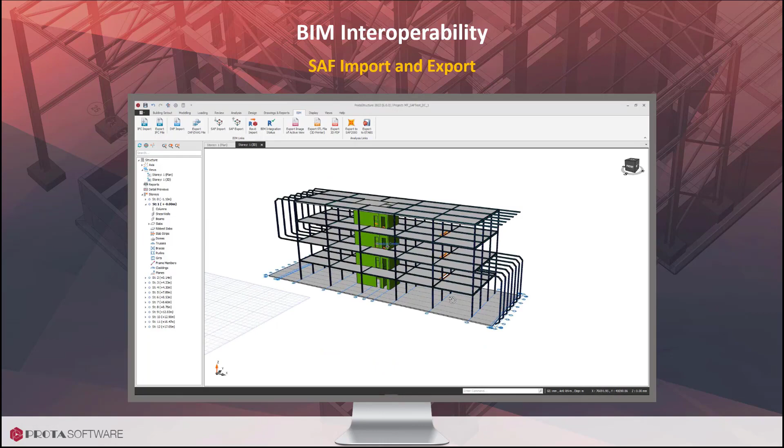One such forum Prota is engaged with is the SAF Working Group Initiative, together with Nemetschek, who deliver technologies including ArchiCAD, Allplan and Scia, as well as many other leading architectural and engineering software houses. This wonderful approach improves the collaboration capabilities between structural engineers and architects through an open exchange format called SAF, for exchanging data between structural analysis and BIM software based on an Excel format.

SAF provides a very practical, easy-to-use format that allows structural engineers to seamlessly share model information with others, and it is provided as an open format.

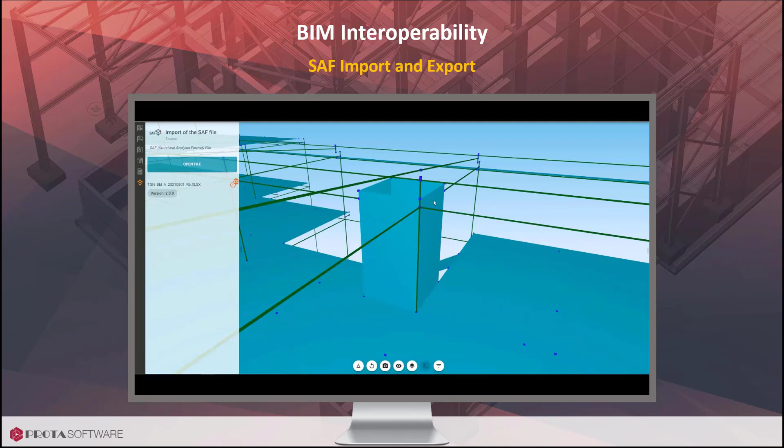ProtaStructure 2022 provides bi-directional exchange with software using SAF, allowing you to share and collaborate on your ProtaStructure models. We are very excited about this developing format, and you'll see some amazing new capabilities progressively introduced as this continues to evolve.

Enhancements with our BIM capabilities don't stop there. We have also made significant improvements in our IFC exchange, largely driven from great user feedback, which takes different variations in IFC models into account.

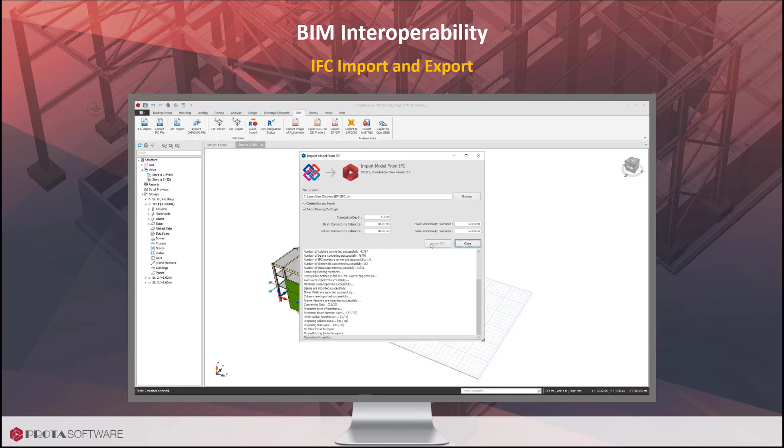For general analysis, we have also enhanced our SAP links, allowing you to export FE floor and foundation models in addition to the building analysis model. All selected analytical models can now be exported at once, together with time-dependent properties for material, for concrete, and stage construction data.

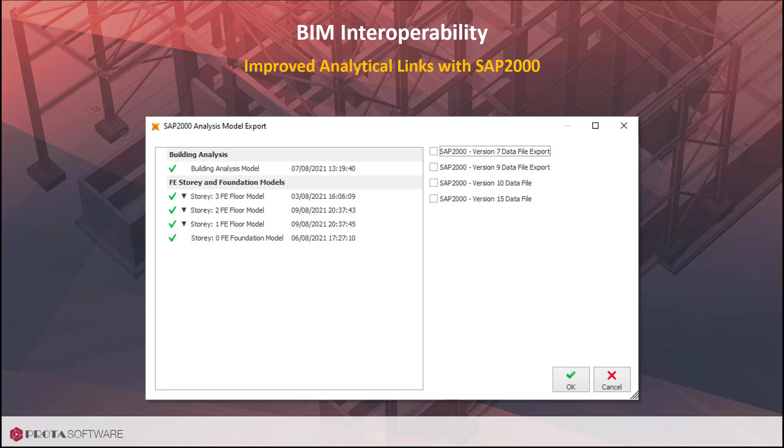All analysis results in Prota can now be exported to Excel, so if you need to interpret and refine the results further within the Excel environment, you can now do so.

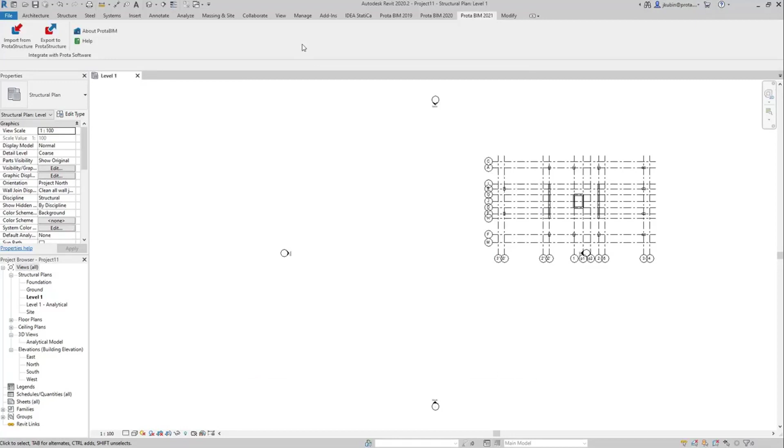Finally, we have also enhanced our integration with Revit, allowing you to collaborate with the latest versions of Revit, and we've also introduced a new custom mapping tool which allows you to perform bespoke mapping between libraries in Revit and ProtaStructure, to map any type of element across into the Revit environment. All fantastic new capabilities allowing you to get the most out of your BIM technologies.

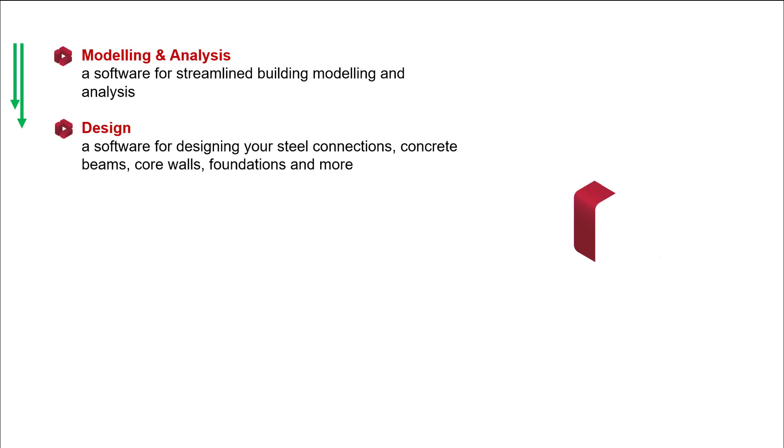I hope you liked today. ProtaStructure 2022 is by far our biggest ever release, providing you with significant new capabilities across modelling, analysis, design, detailing, fabrication and BIM technology, all aimed at providing the ultimate productivity solution for you, in one platform, ProtaStructure 2022.